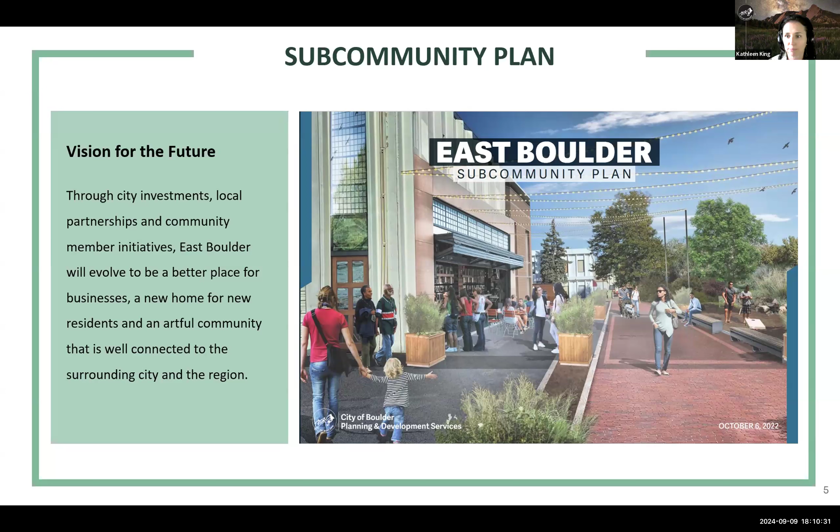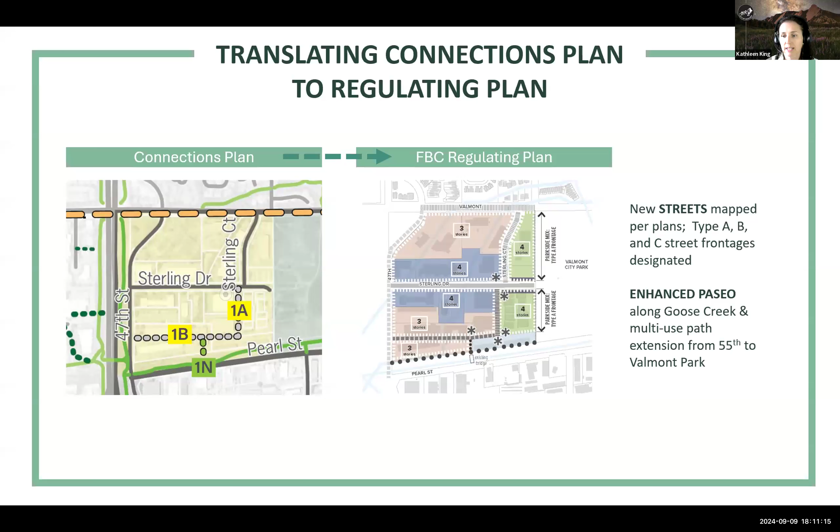So we've moved forward with the recommendation for form-based code and associated code updates to implement the East Boulder Subcommunity Plan. The form-based code includes these regulating plans, and those regulating plans take their direction from the connections plan that's included in the East Boulder Subcommunity Plan. There's all these layers, and we're trying to get all of those layers to align so we can provide consistent direction. In the process of developing the form-based code and those associated regulating plans, we identified 2 changes that we believe will better help realize the overall vision of the plan, and these require some minor amendments to the subcommunity plan.

So here's that connections plan from the East Boulder Subcommunity Plan, and this network was really planned in step with the land uses and those conversations that we had with the community around changing land use. Because East Boulder today is mostly industrial, we have these really large blocks and there's not a lot of access through neighborhoods out there. So the connections plan recommends a few new connections to break areas into walkable blocks and provide more access through changing neighborhoods.

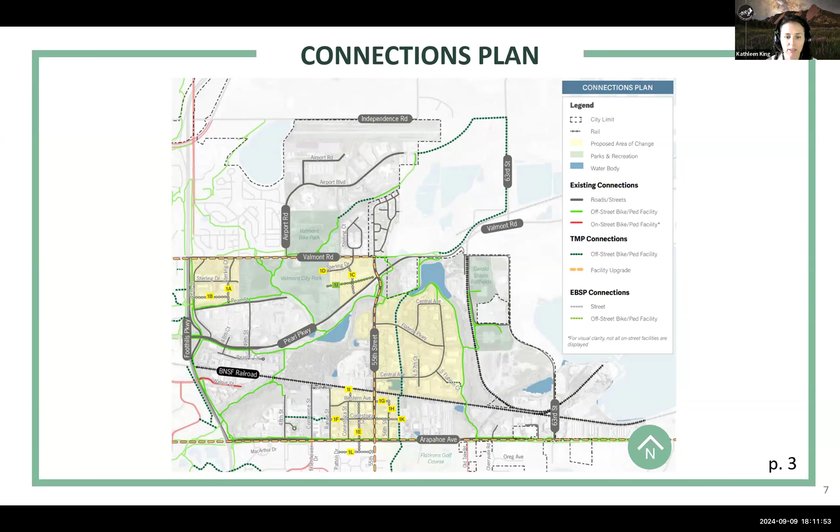As we began translating this connections plan into the form-based code regulations, there were two areas where we identified some revision that would be necessary: the Valmont Park West neighborhood and the 55th and Arapahoe Station area.

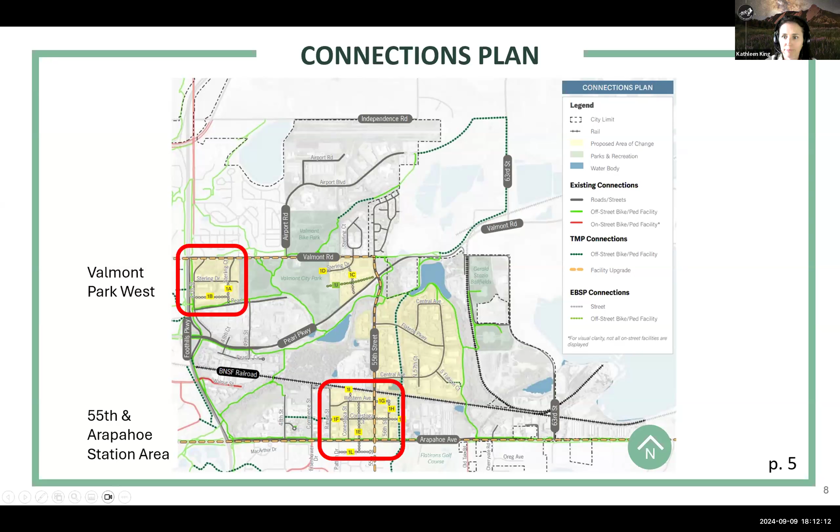We're going to look at Valmont Park West first. This neighborhood is located on the west side of Valmont City Park, so if you've been to Vision Quest Brewery or the Spark Theater, that's the neighborhood we're talking about. We had proposed two new street connections here: the 1A connection, which provides north-south access from Pearl Street to Sterling Drive, and 1B, which creates a new east-west street about a block north of the Goose Creek Trail.

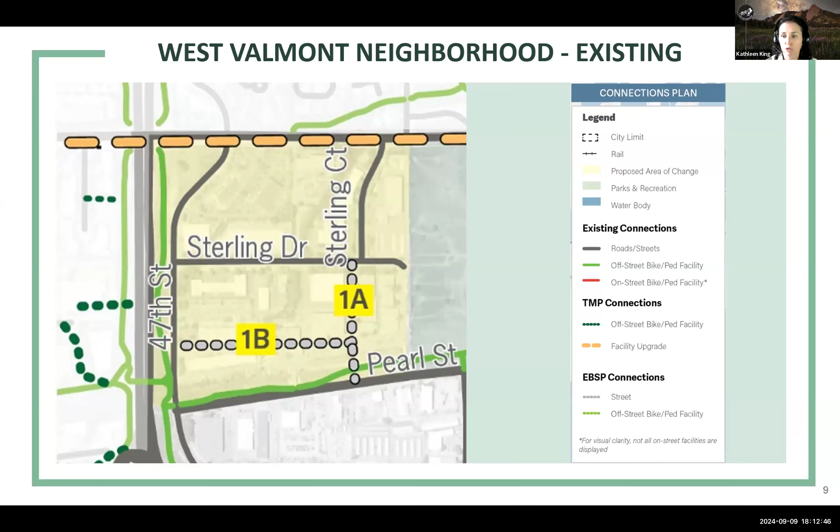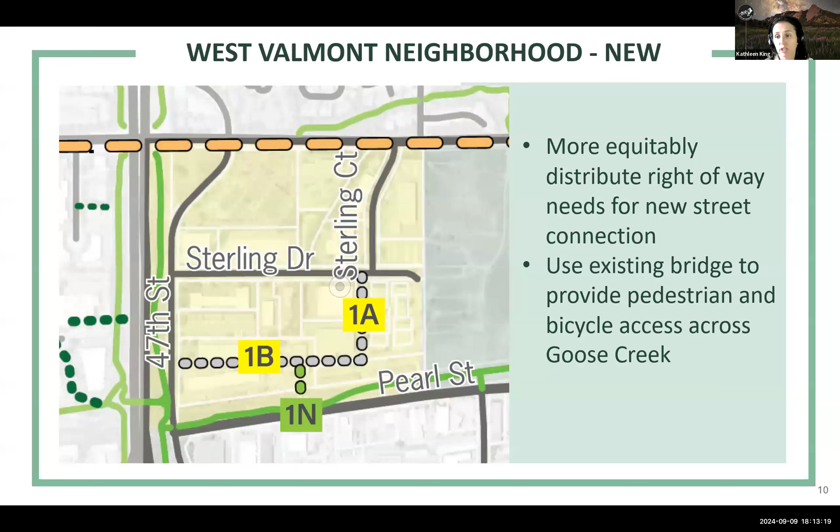The proposed amendment to the subcommunity plan revises the 1A connection, aligning it more with property and parcel lines so we can more equitably distribute the right-of-way needs for that new connection. Instead of proposing a new vehicular bridge over the creek, the 1N connection shown in green takes advantage of an existing bridge, using it as a pedestrian and bicycle bridge to complete that north-south access over the creek.

So this is the second area. I've moved to 55th and Arapahoe. It's called the 55th and Arapahoe Station area because we're planning for a regional BRT station at this corner, and the planned land uses for the neighborhood around it are really geared toward transit-oriented development. We're building the network and the supporting land uses around that concept.

The focus of the new connections here is to create walkable blocks and deliver more access into and through this neighborhood to support that mix of uses. The connection we're amending is 1E, a new north-south street just west of 55th—this is 55th here, and this is Arapahoe.

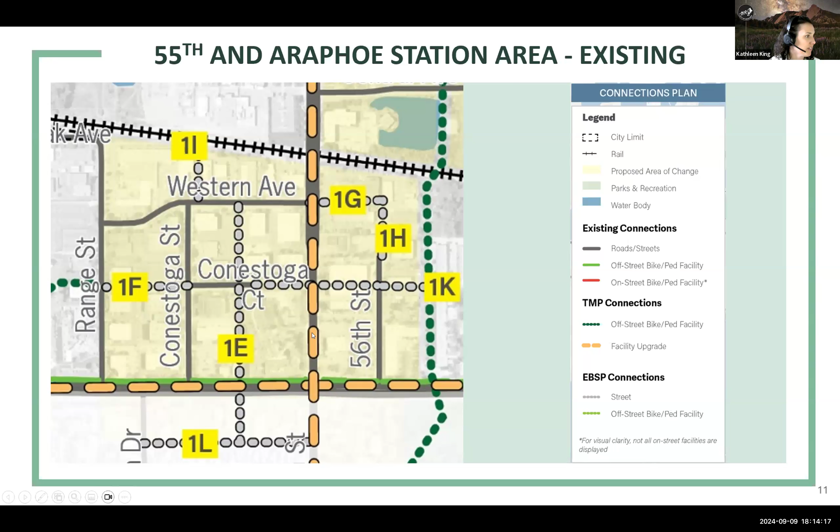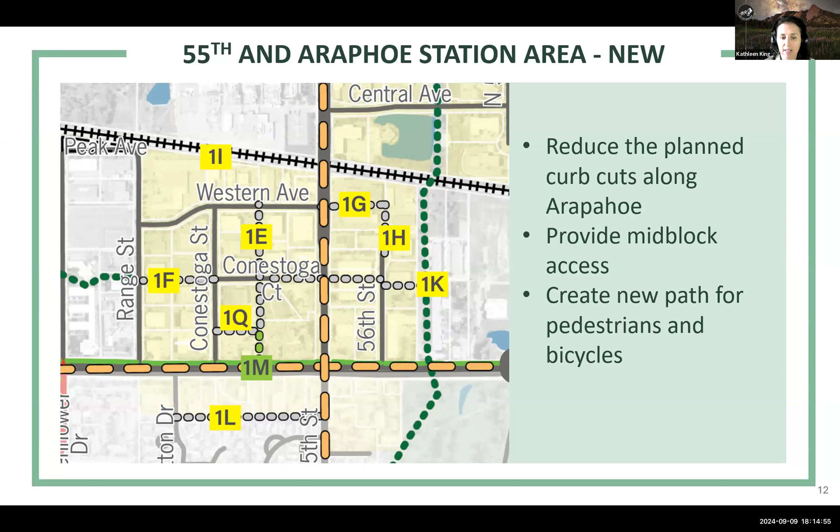As we further studied these connections and planned for implementation of the East Arapahoe Transportation Plan, we're striving to consolidate access and reduce curb cuts along Arapahoe. This new proposed 1Q will connect the 1E connection to an already existing access point along Arapahoe. We still felt a pedestrian and bicycle connection was valuable in this location, so 1M would provide that type of access and requires an amendment to the plan.

We're going to take these proposed amendments, along with some land use plan amendments, to Planning Board next month, and then City Council in November for consideration. The board and council will also be considering updates to the form-based code at this time, and we hope to do all of this at once to create consistency across our regulations for areas in East Boulder as properties start to experience redevelopment in the future.

Thanks, Kathleen. This is a good time for members of TAB to ask any clarifying questions. Darcy, welcome aboard, nice to see you. Does anyone have any questions for Kathleen or Christopher? Mike, go ahead, I see your hand up.

Yeah, so when I first looked at this, I was under the impression this was all about adding new streets, which raised some concerns about ongoing maintenance into the future. But with your presentation, I understand now this is actually about modifying that plan to add streets so that they're more pedestrian and bicycle connections rather than necessarily car connections, which sounds like a good way of moving forward. Can you talk about—I know you mentioned there are large blocks in this area—the need for adding new streets at all here?

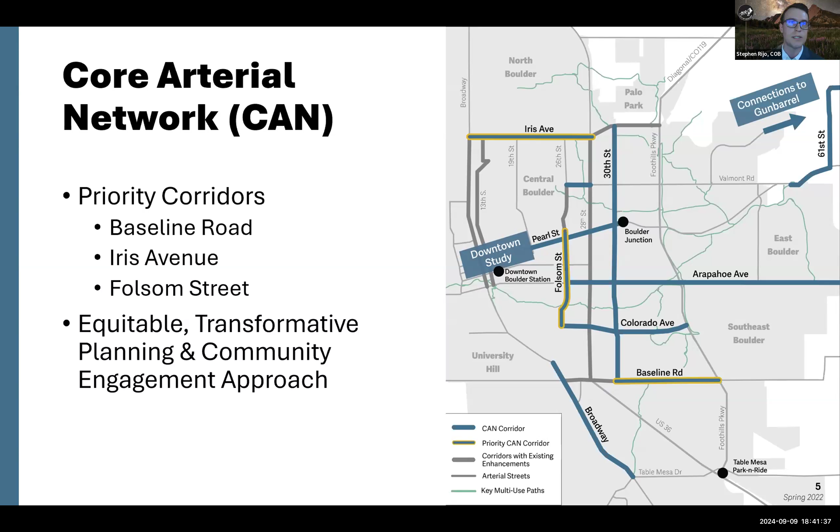After reviewing past plans, policies, existing conditions data, and performed analysis of all the things you see on the screen right now, that really informed and were the data we vetted to get to the conceptual alternatives we'll chat about here.

I wanted to talk about another key input that informed our work: best practices and professional guidance around roadway reconfiguration. The Federal Highway Administration, or FHWA, provides guidance for roadway reconfigurations that can help reduce common crash types seen on 4-lane roadways across the country while improving multimodal safety for all. The FHWA also provides guidance around the types of roads that are strong candidates for roadway reconfigurations, of which Iris fits into. There are several stretches of roadway in Boulder today that carry similar levels of traffic on 3-lane roadways, such as stretches of Arapahoe, Folsom, Valmont, and 28th. Ultimately, it's the ability to reduce speeding and crashes by up to 47% which is the key reason why we're looking at a roadway reconfiguration for Iris Avenue.

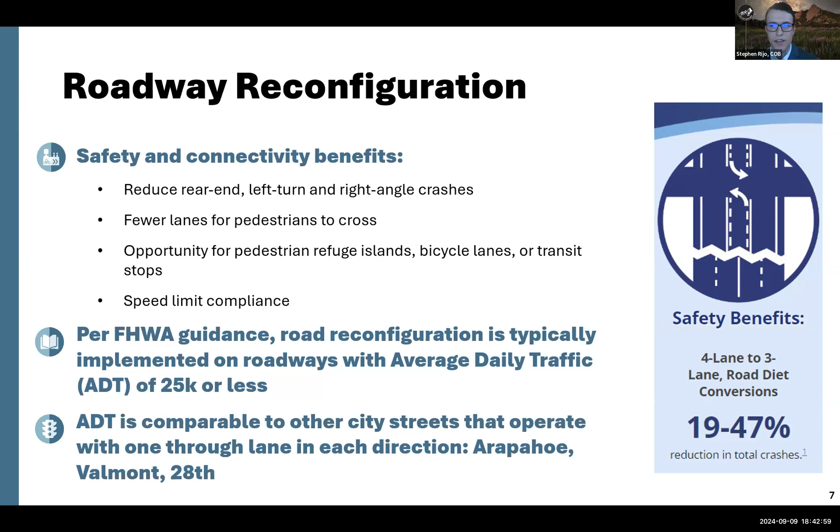I want to highlight that it always takes a lot of partnership from the community, and I know I speak for the team when I say we're really grateful for the level of effort that folks brought to this work.

Also wanted to share a brief update on our most recent engagement at a July virtual and in-person open house. City staff unveiled their recommended alternative, asked about how well folks understood it, and confirmed what themes they were most excited about. It was helpful to see folks organizing their priorities similarly to earlier in the year and last year, which gave the team confidence that they had a strong understanding of community priorities as they wrap up the alternatives analysis and conceptual design phase.

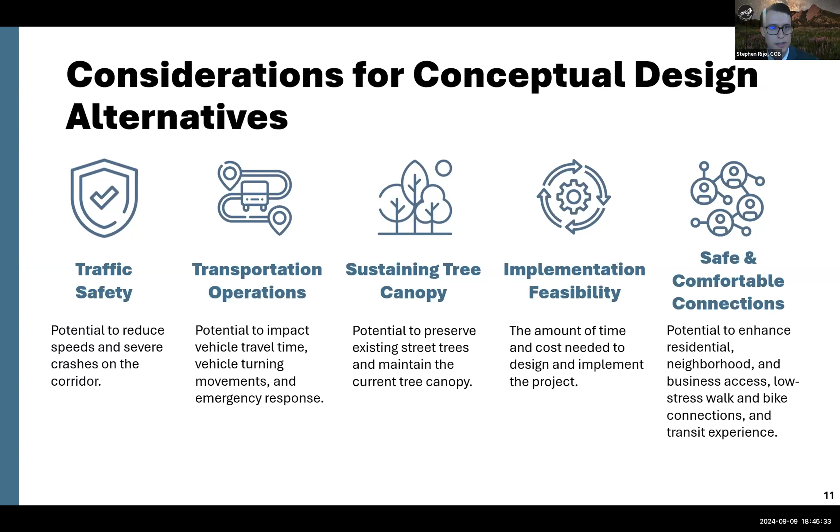With all that background on the project, we can shift to what we're here to talk about today: the Community Environmental Assessment Process, or CEAP, which is Boulder's formal review process that assesses the potential impacts of capital improvement projects to help select the best conceptual design alternative. The CEAP uses established goals assessment checklist questions, supplemented with project-specific evaluation criteria and community input, to get to the staff recommended alternative we'll be discussing today.

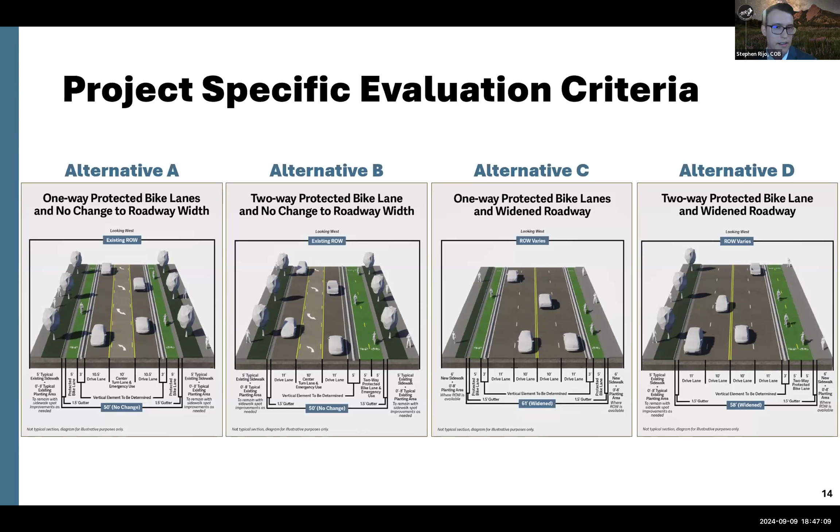After all that background work, the team produced 4 technically feasible alternatives for Iris Avenue: 2 permutations with 3-lane roadways, 2 permutations with 4-lane roadways, and iterations with directional protected bike lanes and 2-way protected bike lanes on the north side of the street. Wanted to give folks a visual of all 4 alternatives evaluated through the CEAP document before we spend most of our time tonight on the staff recommended alternative.

Quickly running through these for the group's benefit: looking at the need for additional transportation improvements, this doesn't expand capacity needs and therefore scored positively for A and B. For the need for additional police and fire services, the hope is that A and B would reduce the need for emergency day-to-day response to crashes, so it scored positively for A and B, neutral for C and D.

When you look at effects on special populations, the way it improves safety for folks scored highly across all options. Then looking at the environmental factors, A and B scored neutrally for most of them because they are not widening the roadway, causing no new impacts to those environmental resources, while C and D did because they were widening one or both sides of the roadway, with the exception being air quality, as both options pose benefits for air quality for various reasons.

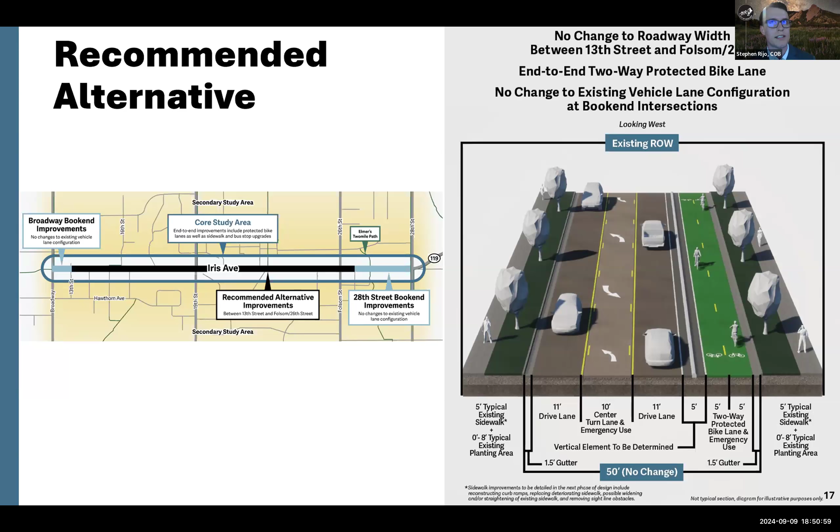The next slide, yeah. So thanks, Stephen. Hi everyone, I'm Lindsay Mers, a Civil Engineering Project Manager. I'll be continuing the review for the scoring of the alternatives. One of the top priorities is to make sure everyone stays safe on the roads, no matter what transportation mode you choose to use.

Through the engagement process, we heard from the community that they're concerned about how unsafe Iris feels right now, and there's a need to slow down speeding and reduce the number of crashes. The data and the plans, like Stephen mentioned, the TMP and the VZAP, back up those concerns.

Alternative B scores high for traffic safety because it includes changes like adding the 2-way protected bike lane and reducing the number of travel lanes from 4 to 3. These changes can help lower speeds by up to 7 miles per hour, which is important because existing conditions show that drivers are speeding on sections of Iris Avenue.

The change from 4 lanes to 3 lanes will lower the chances of rear-end, side-swipe, and broadside vehicle crashes, as well as reduce pedestrian and bicyclist crashes. That's due to the protection and separation for walkers and bikers up to and through the protected intersections. While we often emphasize how these changes benefit vulnerable road users, it's also important to note that drivers, who have the most crashes in this area, will also see significant safety improvements. Next slide.

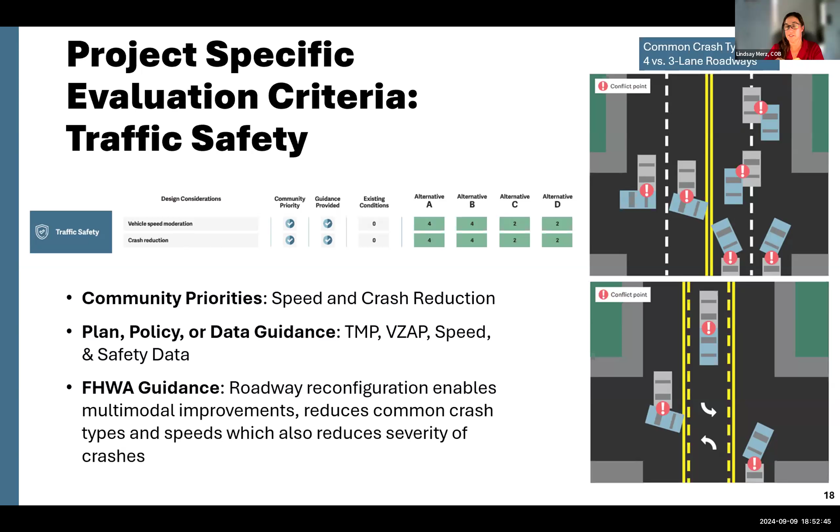The next area to consider is how traffic operates, especially travel time, because Iris is an important east-west route. Option B mostly has neutral scores for traffic operations because it tries to balance vehicle access and capacity with safety improvements for everyone. So there are trade-offs between faster travel times and safety.

Right now, the existing speeding makes travel times seem shorter, but it increases the risk. If we reduce the speeds, we naturally add some travel time as the reconfiguration of the roadway reduces that safety risk. The proposed safety improvements, like the dedicated bike signals, may cause some delays for drivers, but make the road safer for cyclists and pedestrians. Option B aims to improve safety while keeping travel time changes to a minimum, balanced by maintaining the existing lane configuration at each bookend of the corridor, which we'll review shortly.

We measured the current travel times and created models to predict future travel times. This is what our analysis found: on average, trips might be delayed 3 to 46 seconds. For most trips, 95% of them, delays could range from 2 to 58 seconds. The slowest 5% of trips could face delays between 1 second and 2 minutes 9 seconds. This means that for a majority of the trips, delays will be less than a minute.

Similar to what people experience today, during the most congested times, some trips might be delayed by a few minutes. So will folks notice this? Maybe. Is it worth the safety benefits? Certainly. The project team believes these trade-offs are important for making the corridor safer while keeping travel times reliable.

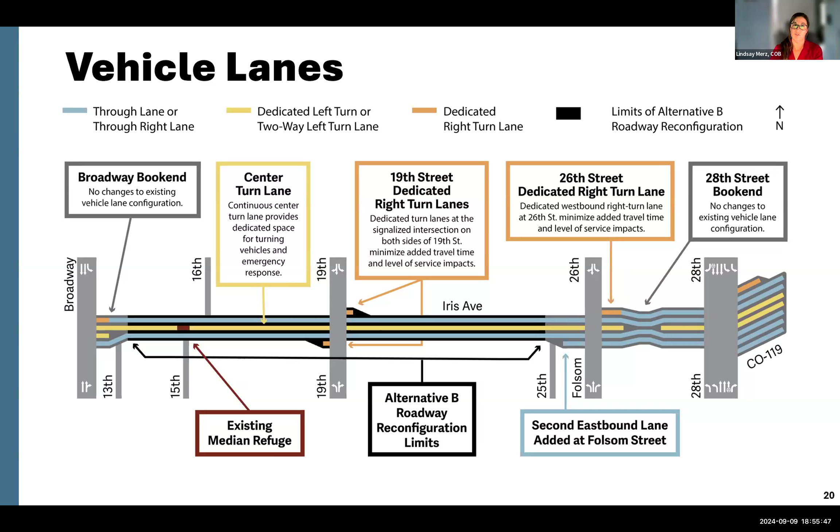As mentioned in the preceding slides, the vehicle lane configuration would not change at the intersection of Broadway, highlighted in yellow on the map. However, there will be improvements made to provide protection and safety for pedestrians and bicycles. The 2-way protected bike lanes will extend all the way to the intersection to make a direct connection to the path that continues west to Foothills Elementary and the Newlands neighborhood.

Other design elements at the bookends include optimized signals and dedicated bike signals and pedestrian phases, similar to today, when the vehicle movements get held so that peds are able to cross. The westbound transit stop will also be upgraded to a shared bus stop, providing a larger boarding area and accommodating the protected bike lanes.

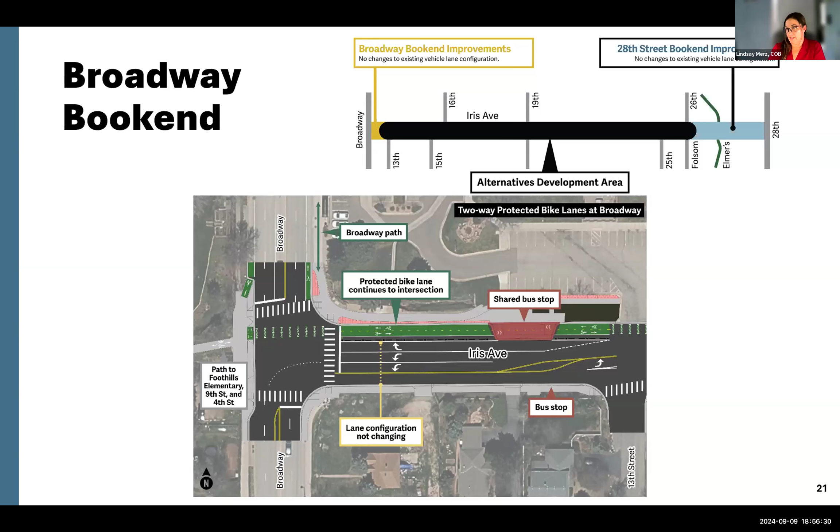At 28th Street, highlighted in yellow, the vehicle lane configuration is also not proposed to change. East of Elmer's Two Mile underpass, the 2-way protected bike lanes on the north side are going to transition to a 2-way sidewalk level facility to provide direct connections to the shopping center, the transit stops, the 28th Street paths, routes to Wonderland Creek Greenway, and the planned diagonal bikeway. A 2-way sidewalk level facility is also added to the south side so that Elmer's Two Mile underpass can be used to access businesses and 28th Street on both sides of the road without having to cross the street at grade.

The 2-way bike lanes are separated from the adjacent sidewalk with a 1-foot buffer. The driveways will also be reconstructed to meet current standards, and that westbound left into the Safeway parking lot will be prohibited due to recurring left turn crashes. The project team will continue to coordinate with stakeholders and business owners as we move forward.

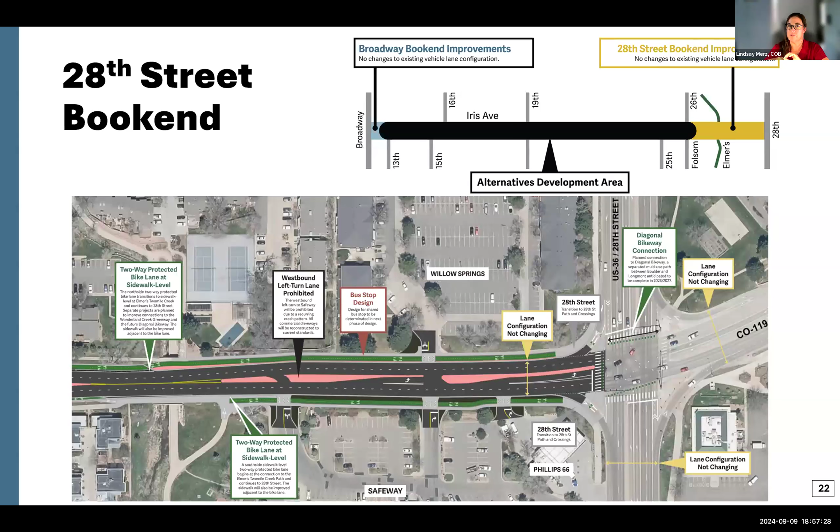Now that we've covered travel times and the role of the bookends, we'll look at how the design improves turning and emergency response. The center turn lane helps by reducing rear end and approach turn crashes, which are two of our most common crash types, and it keeps traffic flowing smoothly. It allows cars waiting to turn left to move out of the through lane so that drivers going straight don't get stuck behind them, making turns feel less rushed and more predictable.

Additionally, the design includes signal changes that separate the bike and pedestrian crossings from the vehicle turns. This separation reduces conflicts at major intersections, making it safer for bicyclists and pedestrians.

For emergency response, the center turn lane offers a clear, predictable space for first responders, providing a dedicated area for emergency vehicles to pass and improving their response times. The design maintains the 4 lanes of capacity to support disaster scenarios. In the event of an emergency, like a wildfire evacuation, the center lane can serve as an extra eastbound evacuation route, while the protected bike lane can be utilized by first responders for westbound travel.

This setup preserves the current level of disaster response capability, but we'll continue to collaborate with Boulder Fire Rescue, with police, and with the Office of Disaster Management as we move forward.

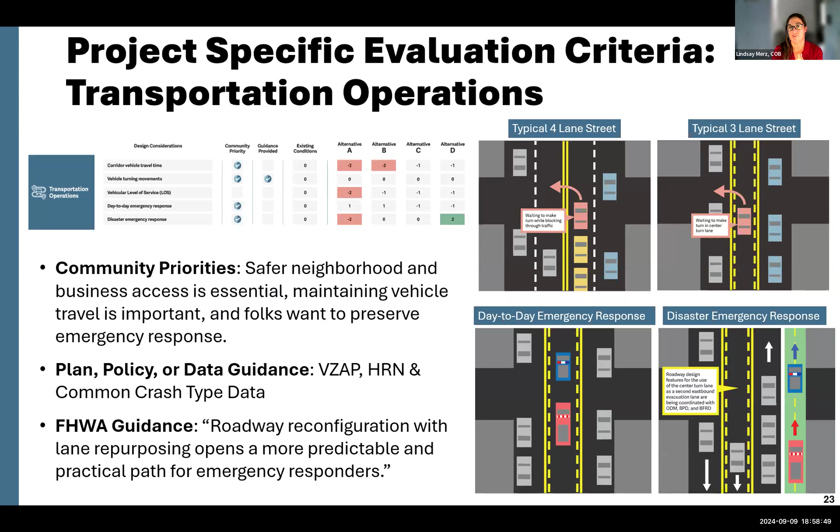The final aspect of transportation operations is how the changes to Iris Avenue might affect the neighborhood streets. We've received feedback from residents worried about traffic being diverted and speeding on nearby streets because of the Iris Avenue changes. To address these concerns, we collected data on current speeds and traffic counts.

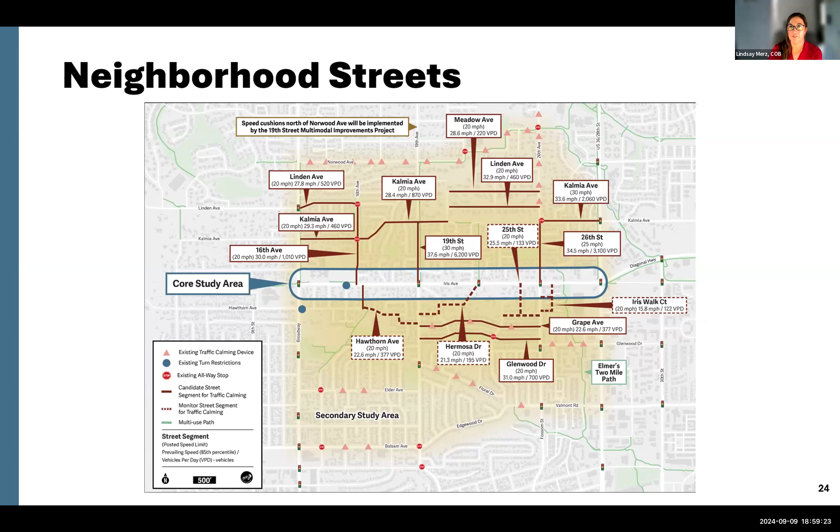The next evaluation criteria focus on creating safe and comfortable connections, which was a top priority for the community. As indicated by the high scores in green, Alternative B performs well in this criteria. Along with the safety and operational improvements, the redesign of Iris Avenue also makes space for enhancements that focus on comfort for biking and walking. Key features like the two-way protected bike lanes, the center turn lane, the protected intersections, the improved transit stops, and the safe pedestrian crossings all contribute to a better experience for those walking and biking.

Alternative B will shift the eastbound travel lane closer to the south side sidewalk, but the reconfiguration of the travel lanes from 4 to 3 lanes will reduce speeding along Iris. That will help maintain a comfortable sidewalk environment as folks make short connections along the south side so they can access the two-way protected bike lanes on the north side.

Additionally, the city will address existing issues by making sidewalk improvements, including reconstructing curb ramps and replacing deteriorating sidewalk. We're going to look for opportunities to widen or straighten out the sidewalk where feasible, and we're going to remove sightline obstacles. These upgrades will be finalized during the final design phase to ensure they fully address any current shortcomings.

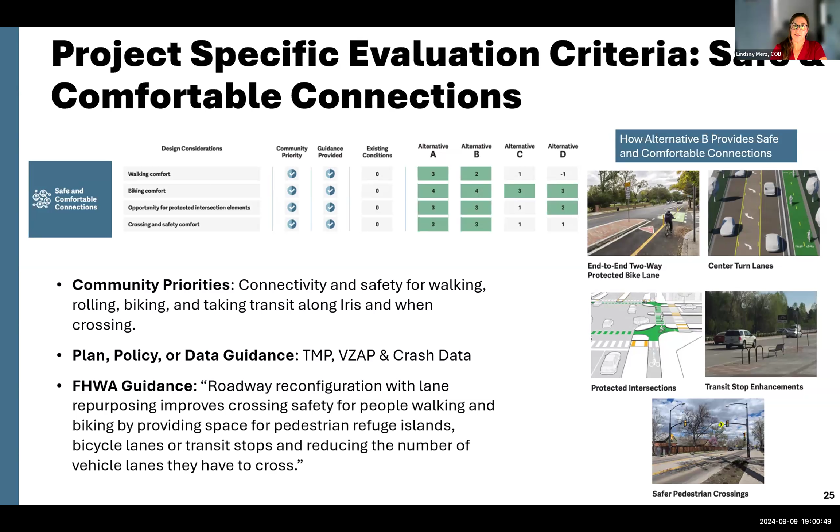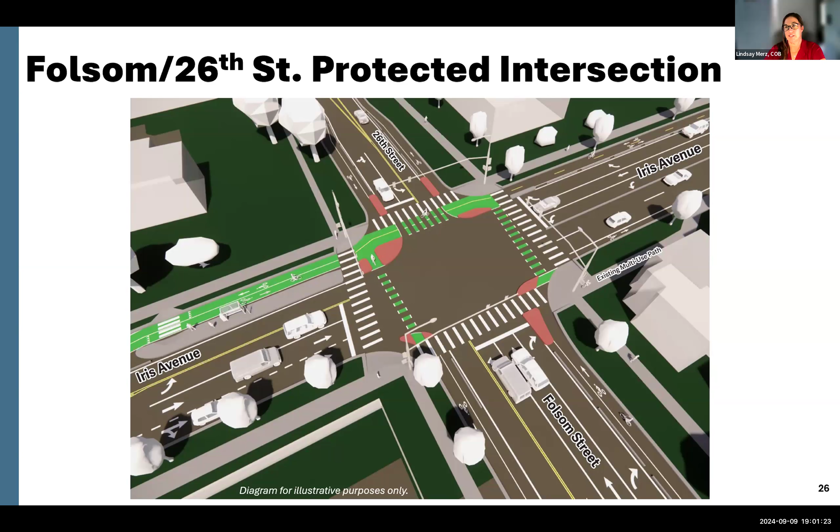Alternative B enhances walking and biking safety and comfort by converting a vehicle lane into space for protected bike lanes and protected intersection features. While both one-way and two-way protected bike lanes offer safety benefits, the two-way protected bike lane is the most suitable for Iris Avenue based on community feedback, citywide objectives, and best practices.

Here's why a two-way protected bike lane is the optimal choice for Iris Avenue. There are fewer conflicts: the north side of Iris has 13 conflict points, like driveways and side streets, while the south side has 34. This significant reduction in conflict points makes it easier to build and maintain, and means fewer risks for cyclists, making the north side more comfortable and safer.

There's increased accessibility. A two-way protected bike lane with its extra width and buffer accommodates side-by-side riding and safe passing, which is important with the rise of e-bikes and families who ride along and across Iris to bring their kids to and from schools and local daycares.

Emergency response benefits: the two-way protected bike lane is wide enough to accommodate emergency vehicles during evacuations, and in emergencies the center turn lane can be used as an additional eastbound lane.

Maintenance efficiency: the two-way protected bike lane is easier and cheaper to maintain. It can be serviced with our standard equipment, and it benefits from southern sunlight for quicker snow melting.

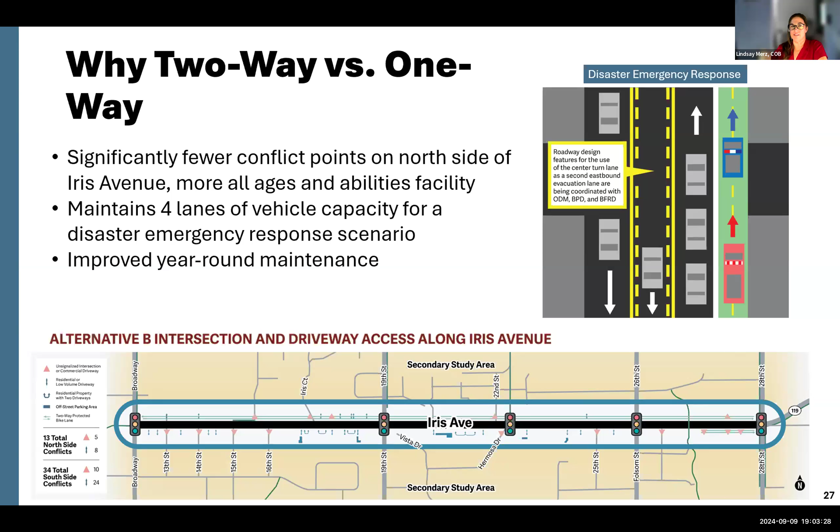Building off the last slide, I want to address a frequently asked question about how this project will design the conflict points between bicyclists on the two-way protected bike lane and vehicles turning across the protected bike lane who may not expect two-way bike traffic, despite having to look both ways for pedestrians.

Potential treatments used in Denver and other North American peer cities include protected intersection elements, two-way signs and markings, raised crossings, removing sightline obstructions, and striping and signal changes that separate vehicle and bike movements at major intersections.

The project team will continue to develop industry best practice design treatments in final design, but these options were considered for the recommendation of alternative B, since reconfiguring from 4 lanes to 3 lanes creates conditions where drivers are only looking across 1 lane of traffic instead of 2. Speeds will be slower, and the center turn lane provides space for turning vehicles to pause, look, and then continue their turning movement.

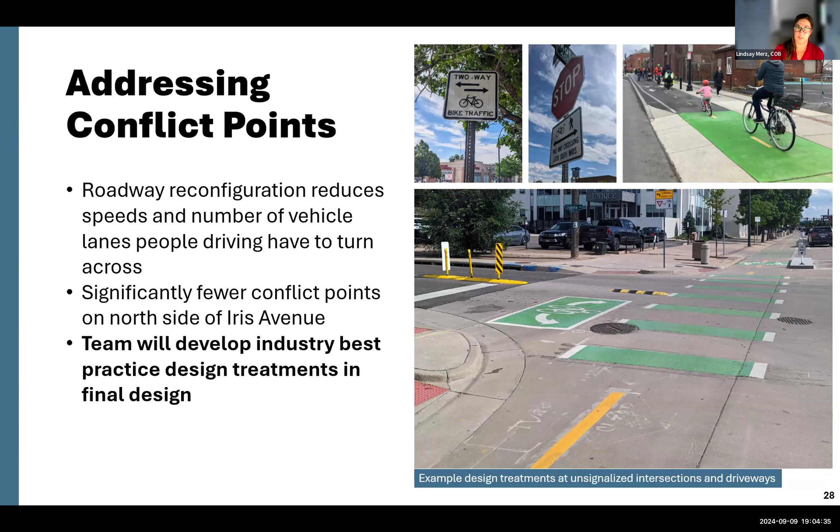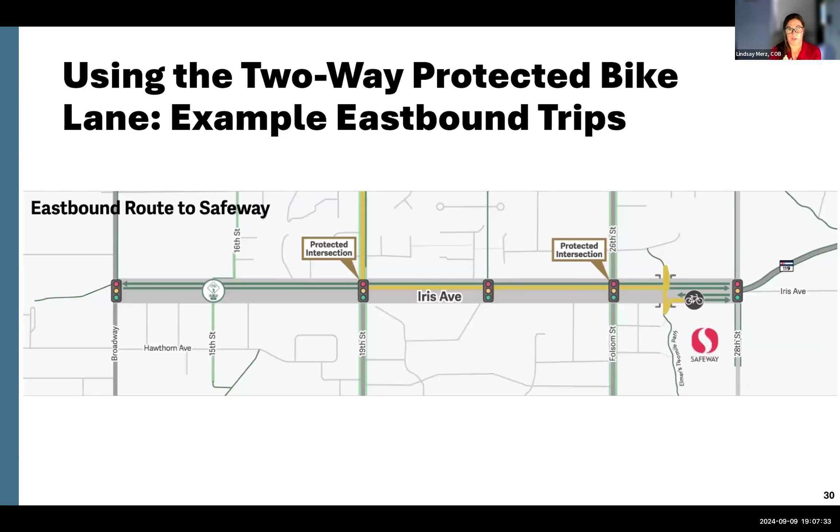Preserving the tree canopy was a key community priority, and one benefit of the staff recommended alternative is that it minimizes impact on trees by avoiding roadway widening. Alternative B preserves 90% of existing public trees, removing approximately 10 to 12 out of 150, closely maintaining the existing tree canopy. The trees that would be removed are to improve sightlines and accommodate sidewalk improvements.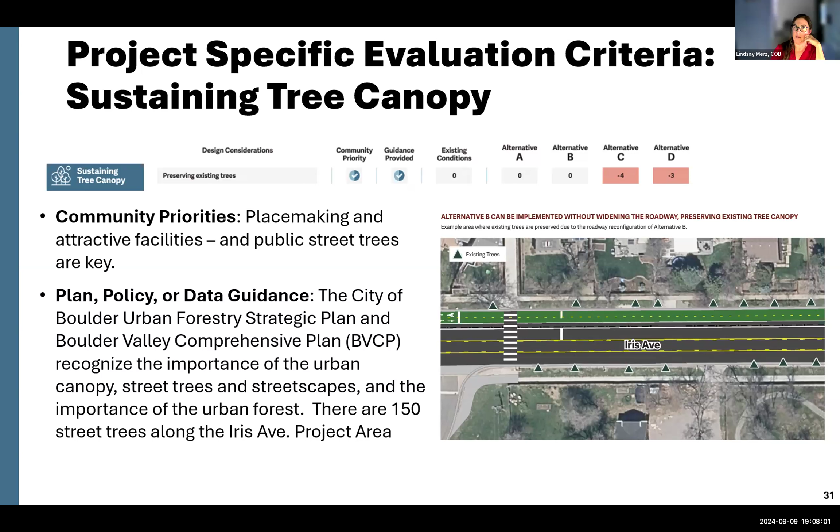Implementation feasibility is an important project criteria, and alternative B enhances safety while fitting within the existing 50-foot roadway width, resulting in fewer impacts behind the curbs. The design requires fewer private property easements, affects fewer existing utilities, and the two-way protected bike lane on the north side means half the vertical infrastructure and fewer shared transit stops to construct and maintain, making the project less costly and quicker to implement. Recently completed projects like Baseline provide early cost estimates for alternative B, around $5 million in today's dollars.

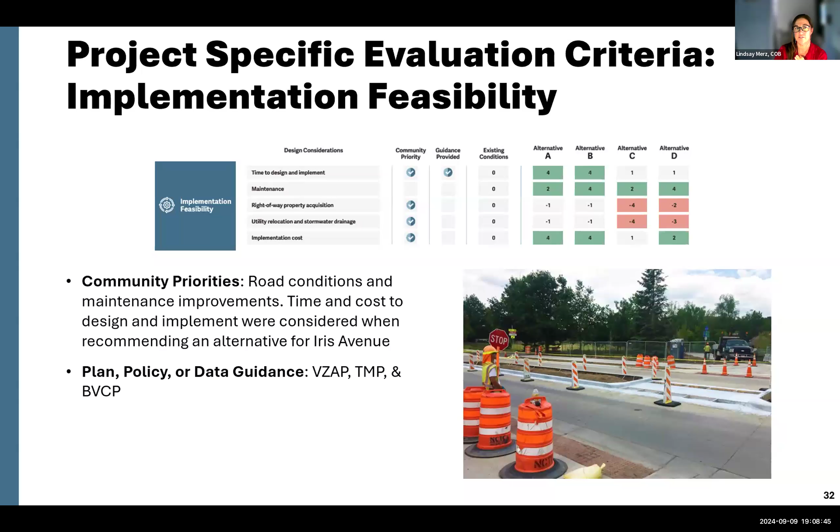After discussing all these project-specific evaluation criteria, here are the scores for each alternative. Alternatives A and B both score higher compared to C and D, reflecting their greater overall benefit. Notably, alternative B surpasses alternative A, providing the highest level of benefit according to our evaluation criteria, suggesting it offers the most significant improvements across the various criteria.

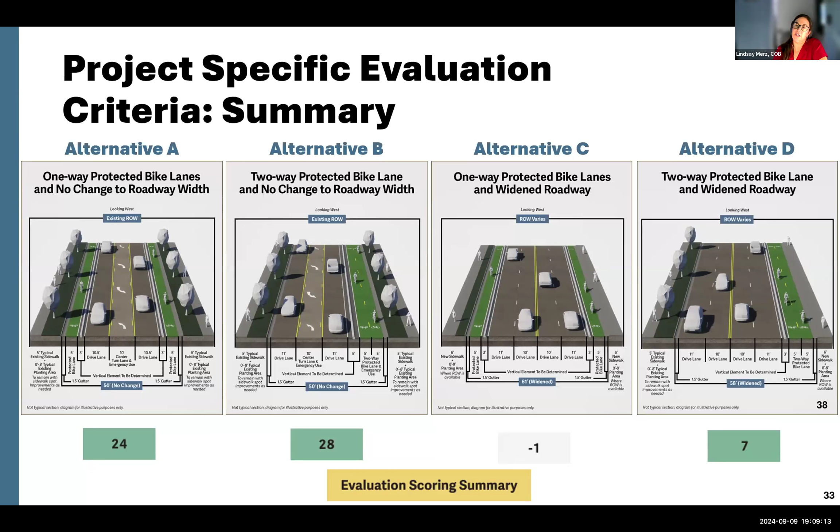Let's look at some more renderings. These illustrate what the staff recommended alternative could look like when looking west from 19th Street. Many key design elements discussed tonight can be seen here, but a few are worth reiterating: the center turn lane helps reduce common types of vehicle crashes, aids in smoother turns into and out of side streets and driveways, and offers dedicated space for emergency responders. The trees are preserved, and adjusting signals to separate turning vehicles from peds and bikes at major intersections enhances safety for bikers, with a smaller effect on vehicle travel times compared to one-way protected bike lanes.

The dedicated eastbound turn lane onto southbound 19th Street means we're not widening the roadway, which costs less, takes less time, and minimizes property impacts. The two-way protected bike lane supports riders of all ages and abilities, disaster emergency response, and year-round maintenance. The transit boarding islands eliminate conflicts between buses and people biking and shorten the distance to cross Iris. Corner islands reduce the risk of crashes by physically separating people walking and biking from vehicles, and shorten the crossings for bikes and peds.

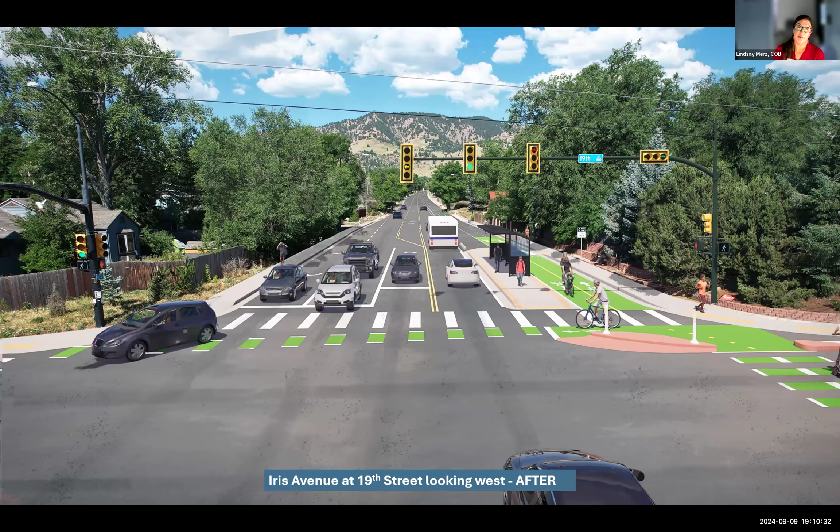It should be noted that the vertical separation material for the protected bike lanes and raised transit boarding islands will be determined in final design, pending detailed floodplain analysis.

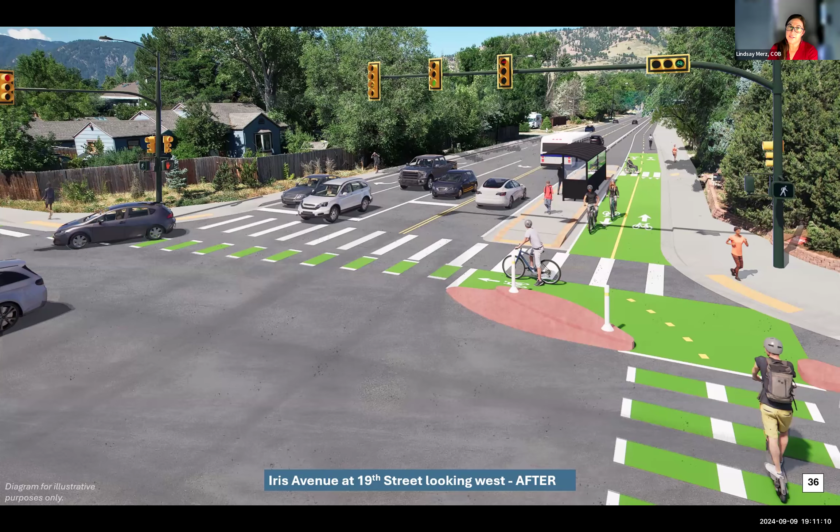One more rendering and then I'll be done. This perspective provides a view of the protected bike lane and highlights various protected intersection elements in greater detail. Some of these elements are designed to be mountable, allowing trucks and emergency vehicles to navigate through them if needed. Additionally, this view illustrates how the transit stop improvements effectively manage the flow of bikes and bus riders, ensuring an organized and efficient space for all users.

With that, I'm going to hand it back to Stephen.

Thank you so much for all that info, Lindsay. Super informative. With that, I'll close us out with a brief summary before discussing next steps and moving to the TAB recommendation. A quick summary: alternative B is the staff recommendation, and this recommendation was informed by a robust public process that really focused on safety improvements, in addition to providing that end-to-end protected bike lane.

The CEAP checklist and project-specific evaluation criteria influenced the staff recommendation, and ultimately we'll be asking for your motion to support the staff recommendation to City Council. Next slide, please.

You can see the immediate next steps on the slide. Today, we're at Transportation Advisory Board, looking for your recommendation. Then we will be at Council on the 19th, where we will bring forward the TAB recommendation and see if the project is called up or not. If it is called up, we will then be in front of Council in October, and depending on how those steps go, fall onwards is when we would transition into the final design process.

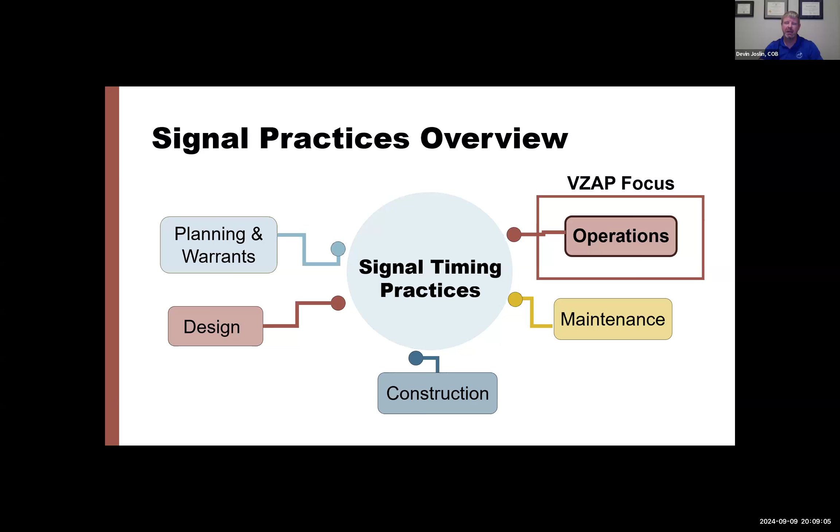The action plan specifies that once the practices are updated, any changes recommended as a result should first be implemented across the high-risk network, then other signals. The action plan also acknowledges that the city will likely need to pursue and secure grant funding to fully fund signal enhancements.

The 3 topics in bold that we intend to focus the update on mostly correspond to the crash types that occur at signals, as I'll show later in the presentation. These are also the topic areas corresponding to the Vision Zero Action Plan actions. I'll now speak more in depth about each of the 3 topic areas on which the update to the practices is planned to focus.

Signalized left turn movements can be operated in 3 primary ways. The options for left turn phasing typically involve trade-offs between safety and efficiency. Left turn phasing types include permitted only, protected only, and protected permitted. Some advantages and disadvantages of each phasing type are as follows.

Some advantages of permitted only phasing are that it can allow for shorter cycle lengths, which can lead to reduced pedestrian delays and longer pedestrian crossing times, as well as fewer change intervals each cycle. Some disadvantages of permitted only phasing are that it has a higher number of potential conflicts with other vehicular, pedestrian, and bicyclist movements, and that left turn demand may not be adequately served each cycle, potentially resulting in delays and queues.

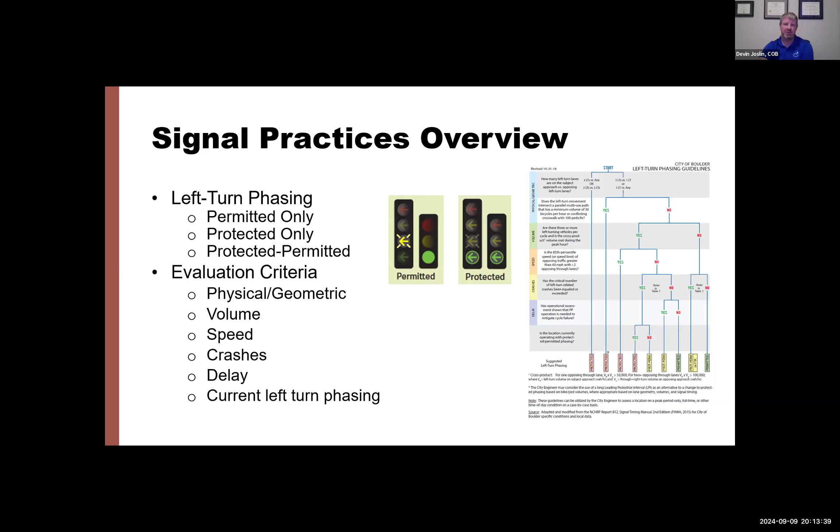To date, the current practice seeks to provide the least restrictive form of left turn control that provides an appropriate balance between the crash history, potential for conflict, and mobility of all road users.

Right turn on red restrictions may be put in place to reduce conflict between movements and modes of traffic where certain conditions exist. Factors evaluated include sight distance, multimodal volumes including high volume multi-use paths, signal phasing, crash history, and intersection geometry.

A right turn on red restriction generally reduces conflict between pedestrians and turning traffic at the crosswalk perpendicular to the right turn movement. However, it shifts the conflict point to the parallel crosswalk to the driver's right as they turn, referred to as right turn on green conflicts. For this reason, evaluation should include an assessment of relative pedestrian and bicyclist volumes and exposure at both potential conflict points.

Experience with right turn on red restrictions in the city of Boulder has shown that driver compliance can be a concern, and resources to enforce these restrictions are limited. Given the compliance concerns, use of right turn on red restrictions should be selective so that respect for these restrictions is not eroded at locations where their use is highly justified.

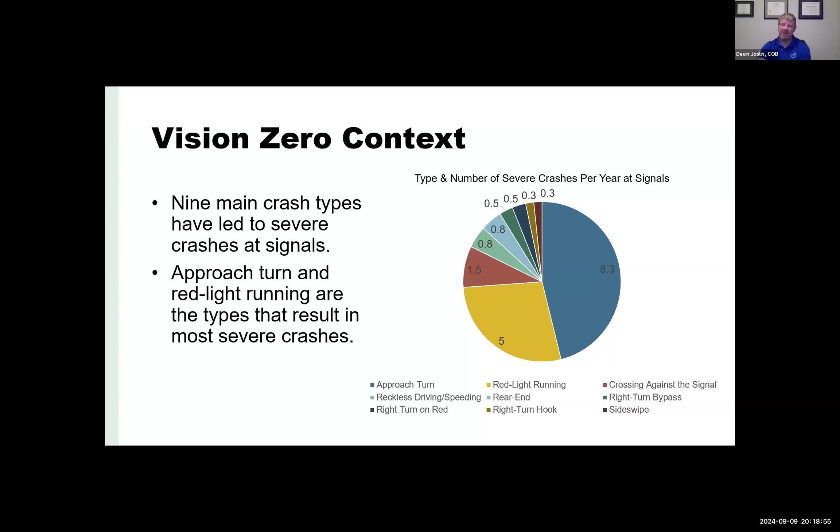Common causes of left turn crashes at signals include an inability to see oncoming traffic, assuming oncoming traffic will stop when the phase changes, misinterpreting the traffic signal indication or phasing, choosing an inadequate gap, and failure to see bicyclists, pedestrians, and motorcyclists.

Taking a look again at the overall citywide annual severe crash picture, left turn related crashes make up about 17% of all annual severe crashes. The update to the practices is focused on driving down that number, but even eliminating all left turn severe crashes would leave a significant amount of work to be done to reach zero.

That is why the Transportation and Mobility Department and the transportation operations team must take a multifaceted engineering and systems-based approach to getting to zero, and why no one single action will get us there.

Good crash data is critical to fully understand the causes, possible countermeasures, and possible impacts of changes related not just to left turn crashes, but all severe crashes.

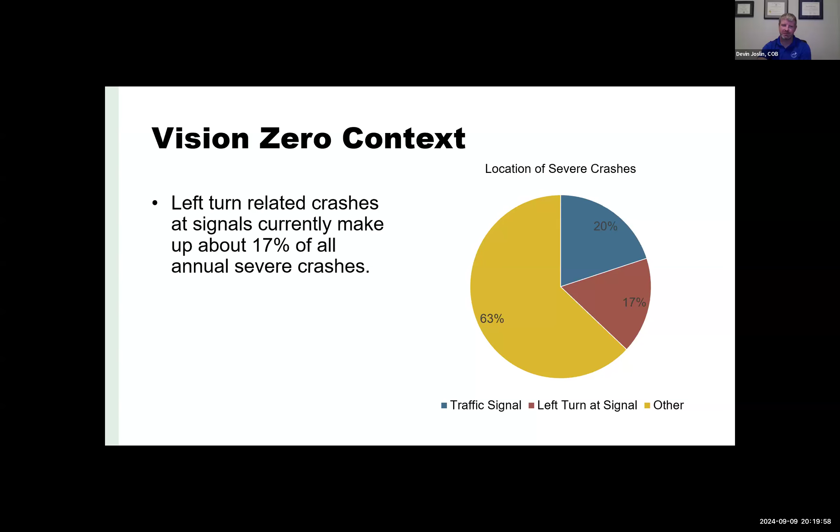Since 2018, transportation operations staff has been strategically implementing signal practices to address the most problematic locations and proactively make changes where conditions met criteria to do so. Many of the locations where changes have been made were identified through prior crash data analysis done for Safe Streets Boulder reports.

Flashing yellow arrow signal heads have been installed at 149 intersection approaches. Left turn phasing changes have been made at 54 approaches. Leading pedestrian intervals have been installed at 77 approaches, and right turn on red restrictions have been installed at 7 approaches.

Flashing yellow arrow signal heads are not new to the city. They were first installed 20 years ago at the intersection of Table Mesa Drive and Tantra Drive, and the transportation operations team has been steadily adding them at every opportunity.

The most recent round of phasing changes was implemented earlier this year and included changes to protected only operation by time of day for 6 approaches at 6 intersections.

The progress made is significant and has resulted in a 68% reduction in all left turn crashes at signals. That includes property damage only and severe crashes, but it dropped the number of crashes per year from 76 crashes to 25 crashes, again representing that 68% reduction.

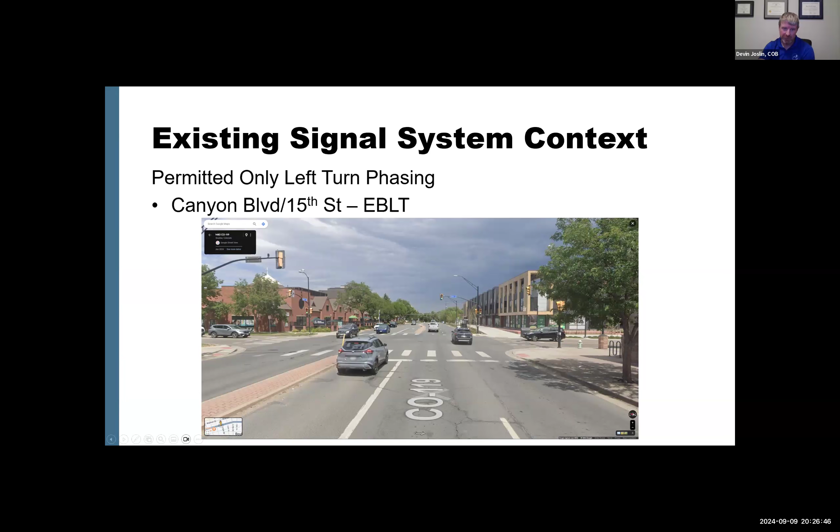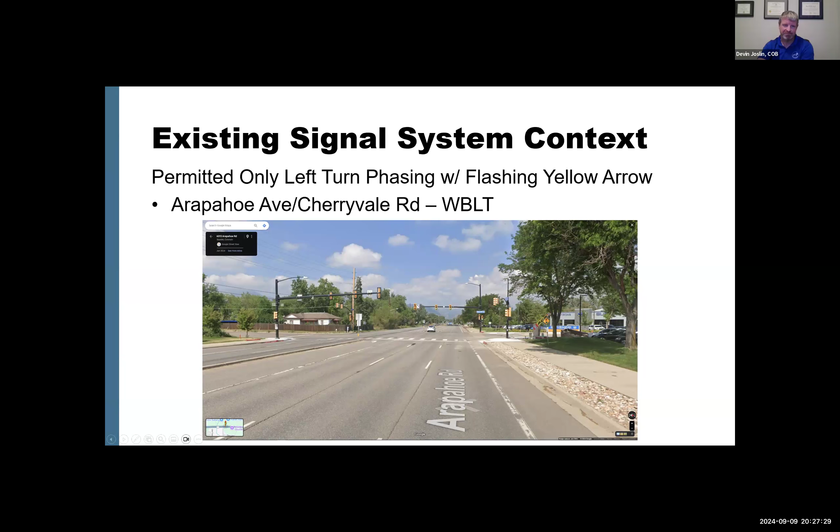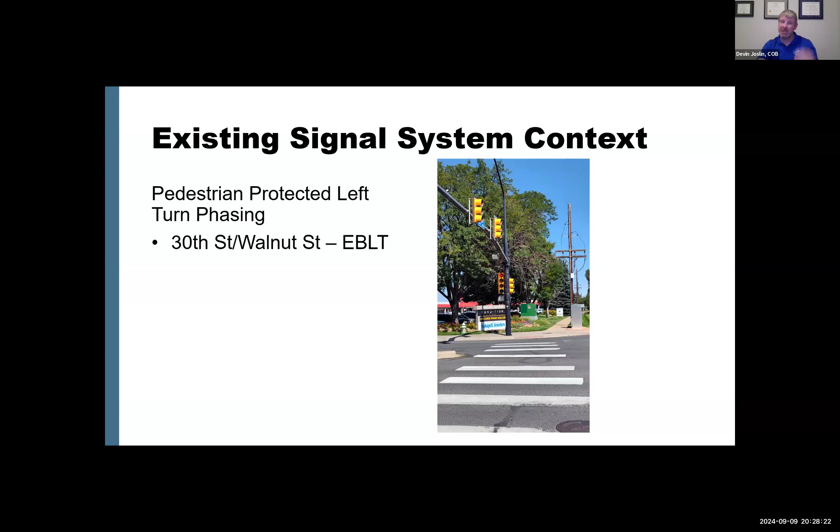Another type of phasing that I didn't describe in detail, but is one that we plan to explore with this update to the practices, is what's called pedestrian protected left turn phasing. The picture shows the eastbound left turn at 30th Street and Walnut Street. With pedestrian protected left turn phasing, when a pedestrian pushes the push button to cross the street, the permitted phase will be excluded and only a protected phase will be displayed. So as you can see in the picture, while the walk phase and flashing don't walk phase is indicated, left turn drivers see a red arrow and are not allowed to turn. But it's conditioned upon a pedestrian being present and pushing the push button to cross.

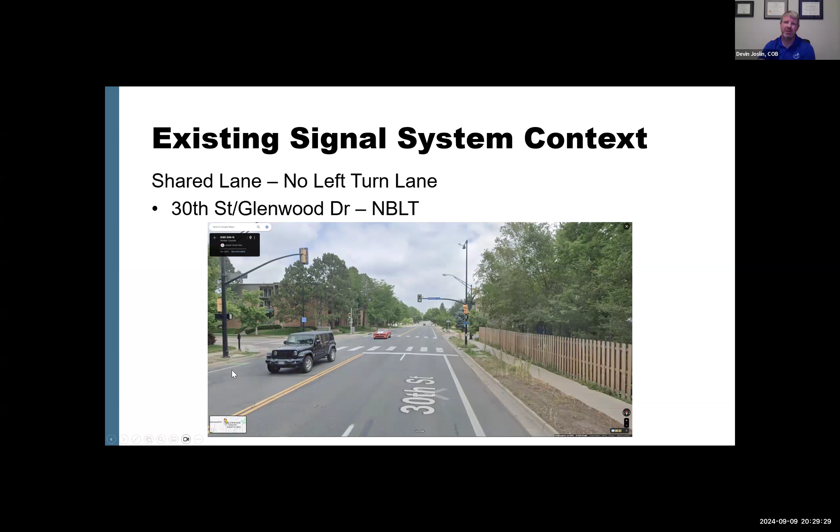Just a few more slides. The scope of work for the signal practices update will consider the following aspects pertaining to key topic areas of the operations section. It will strive to understand the various levers that can be adjusted and the technical considerations, costs, and impacts of doing so.

The scope will explore some new practices, such as related to protected right turn movements. It will take a deeper dive into the evaluation criteria and give particular consideration to the risk and exposure concept. Certain design guides are beginning to review the anticipated number of pedestrian or bike conflicts on a per signal cycle basis, and that might be something that we explore with the evaluation criteria.

It'll also take a detailed review of the crash data to understand if current crash thresholds are appropriate. And it will consider the pedestrian and bicyclist experience, especially in contexts that are planned to be introduced, such as along Iris with a two-way protected bike lane.

It'll also give consideration to sight distance under varying conditions and the sight distance at different times of day and times of year, and based on the location of oncoming and opposing traffic. It'll take a look at some of the trade-offs in cycle lengths, queue lengths, signal coordination, changes in travel patterns, and even trade-offs related to safety, such as those additional change intervals that I mentioned.

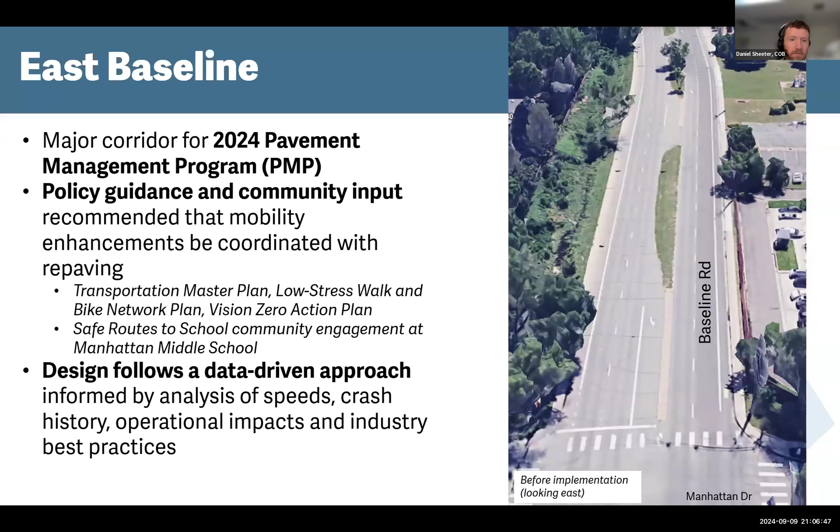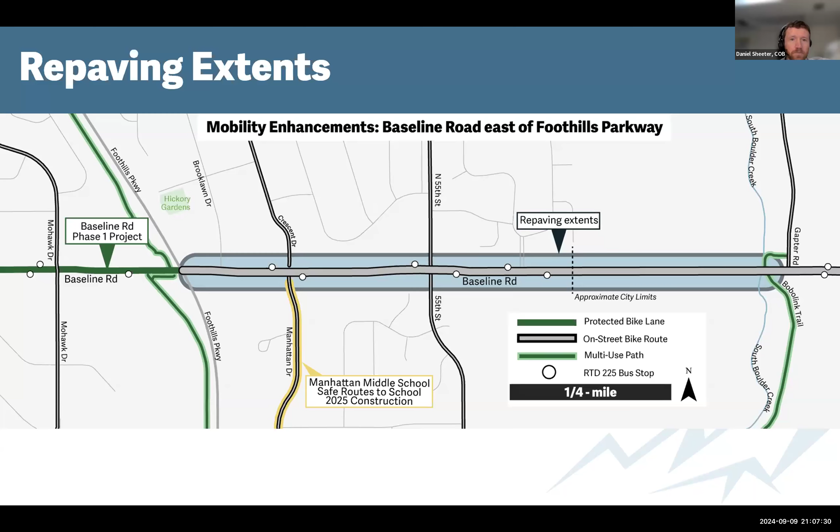So the mobility enhancements are focused between Brooklawn Drive and 55th Street and consist of specific operational improvements for people driving and biking that are created through the reorganization of space within the roadway. One travel lane in each direction was repurposed to create space for dedicated right turn lanes at all side streets and post-separated bike lanes. The roadway reconfiguration and post-separated bike lanes are anticipated to reduce vehicle speeds by up to 7 miles per hour on a street segment where existing prevailing speeds exceed the posted speed limit by 7 to 8 miles per hour. Reducing the number of lanes people walking and biking have to cross at Manhattan Drive and 55th can also reduce the potential for a common crash type identified in the Vision Zero action plan. The extension of separated bike lanes east to 55th provides the adjacent neighborhoods with a low stress bike connection to the Baseline phase 1 and planned phase 2 improvements.

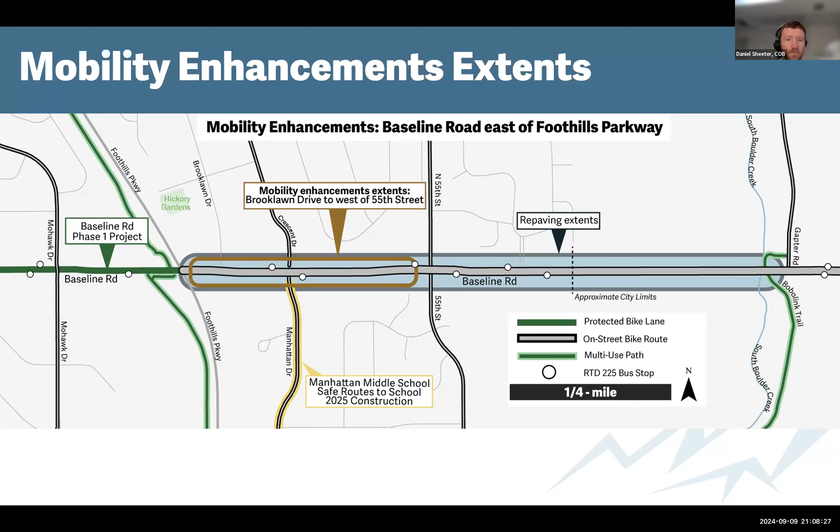And then a couple design details to note. The existing vehicle lane configuration at the intersections with Foothills Parkway and at 55th Street were not changed, and the enhancements are not expected to change vehicle travel time. While implementing physical vertical bike lane protection was not feasible with this road repaving effort, timeline, and available funding, future efforts could extend the physical protection east of Foothills Parkway that you saw with Baseline phase 1. The operational improvements implemented as part of these mobility enhancements create the space required for vertical elements to be implemented in the future. The speed limit setting and signing project, which came to tab earlier this year, already implemented a speed limit reduction between 55th and the city limits, so kind of the center of the map there.

As a result, there's a consistent 35-mile-per-hour speed limit from the city limits west all the way to Mohawk Drive on the other side of Foothills. Staff also coordinated with Boulder County to stripe a double solid yellow center line on the 2-lane segment out to South Boulder Creek. And then finally, a separate project led by our operations division and capital projects division will implement signal upgrades to allow for protected northbound and southbound left turn phasing at Baseline and Manhattan Crescent in winter, spring 2025. And we're not done yet. From there, construction of the grant-funded Safe Routes to School project south of Baseline Road to Manhattan Middle School is planned later in 2025.

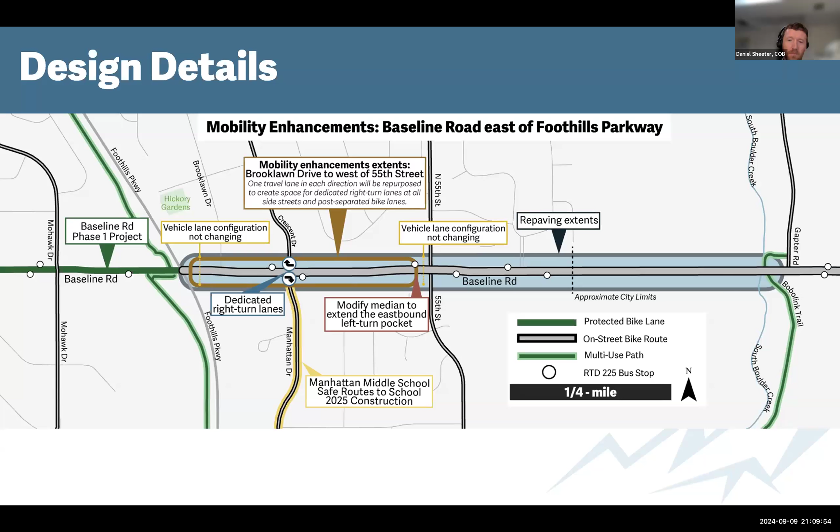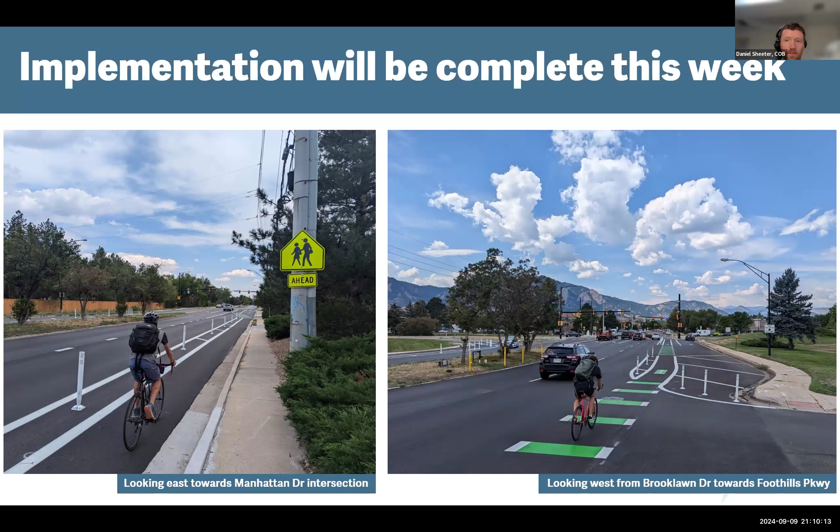Excellent, I was hoping for pictures. Tab, any response other than just excellent? Beautiful, yeah, amazing. Thank you so much. Good job, thank you for the support. Yeah.